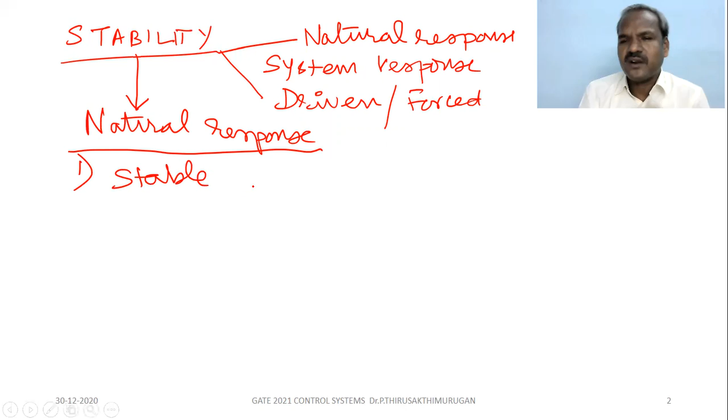What is a stable system? Its natural response becomes zero as t tends to infinity. That means a system is stable if its natural response tends to zero as t tends to infinity. So when we apply t equal to infinity, it should give zero.

The second category is unstable. So what is unstable? It is called unstable when its natural response tends to infinity as t tends to infinity. So when t tends to infinity, its natural response also tends to infinity. This is called unstable.

Third is marginally stable. What is the natural response for marginally stable? A system is marginally stable if its natural response neither decays nor grows. This is called a sustained oscillation.

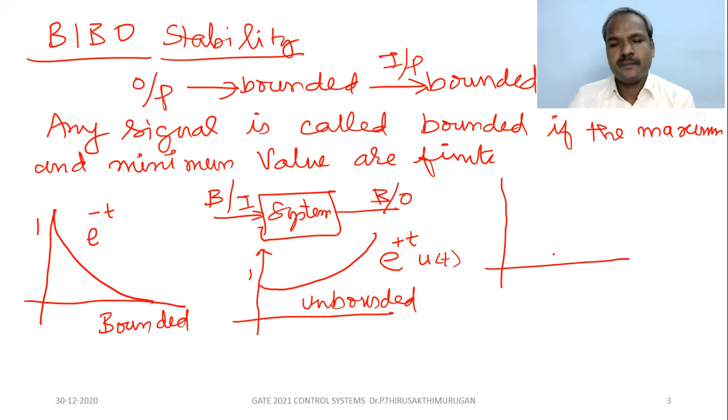One more example. This is unbounded: positive exponential, e of t, u of t. This is an example of unbounded. Consider a ramp input, the ramp response. This is also unbounded.

Ramp is an example for unbounded. So ramp. Another, see, sinusoidal. Okay, sinusoidal signal with progressively increasing amplitude, say starting from this, like this. So this response is not bounded, sinusoidal. This is called not bounded.

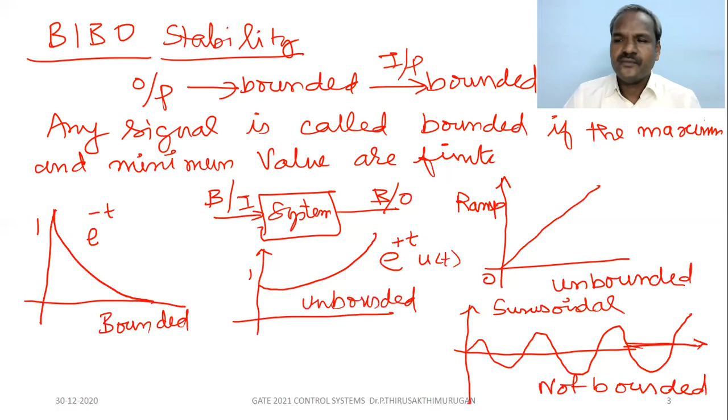Understand? See, if the exponential is positive, then it is unstable. If we have exponential negative, this is stable. Exponential negative means stable. So basically,

see, the stability of the system, the stability of any system depends only on the location of poles, not on the location of zeros. Understand? So in the transfer function, denominator roots are called poles, numerator roots are called zeros. So the stability never depends on the location of zeros.

So the stability of any system depends on the location of poles, don't forget, not on the location of zeros. Understand, my dear student friends? So, another condition. Okay, this is one condition.

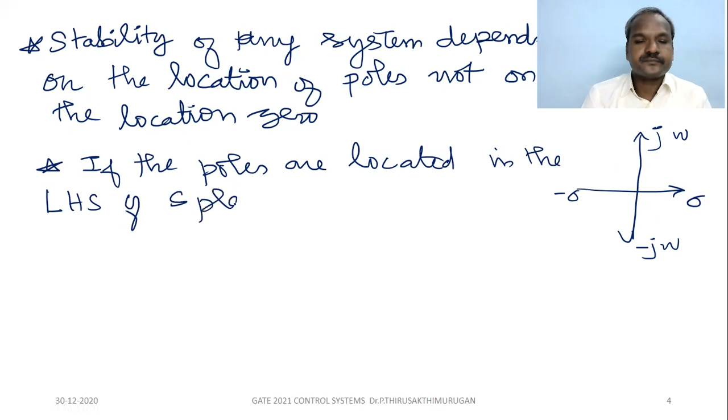Another condition: say this is the S plane, real, minus real, imaginary, minus imaginary. This is the imaginary axis, this is the real axis. If the poles are located in the LHS, the left hand side of the S plane, then the system is stable.

Next is the impulse response. We can also classify based on impulse response. The impulse response of a causal and stable system must be absolutely integrable between the limits 0 and infinity. So the impulse response of a causal and stable system must be absolutely integrable.

Between the limits. What are the limits? From 0 to infinity. Say you can have the integral from 0 to infinity of the impulse response, dt. So the impulse response of a causal and stable system must be integrable between 0 and infinity. Clear?

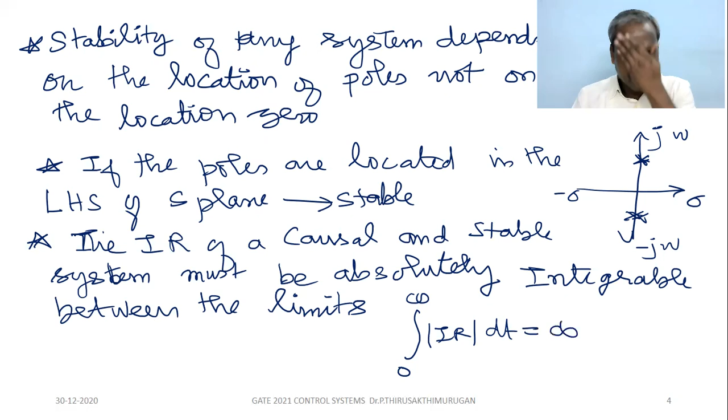Clear? Unstable. For the stable case, the integral is not equal to infinity; the system is causal and stable. Here, the integral from 0 to infinity of the impulse response dt equals infinity, because it is unstable.

If one or more poles are located on the right half of the S-plane, the system is unstable. If one or more roots or poles are located on the RHS of the S-plane, then the system is unstable.

What is the condition for unstable? The integral from 0 to infinity of the impulse response dt equals infinity.

Say, as poles approach the origin, stability decreases. Another important point: as a pole or poles approach the origin, the stability decreases. Say this is a pole, as a pole approaches towards the origin,

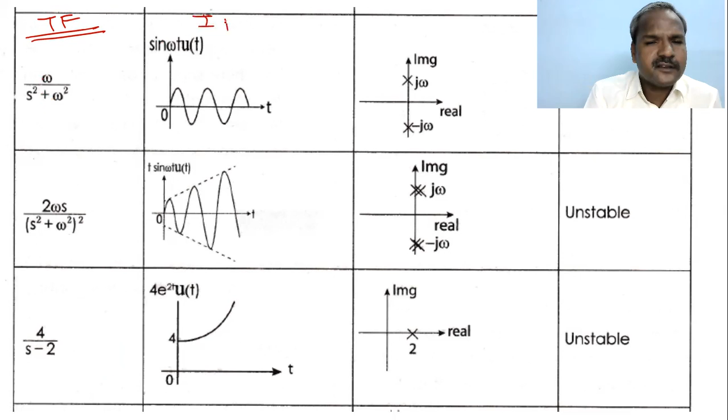Let's see some of the approaches. The first column is the transfer function. Let me change the color. Say this is a typical transfer function of a system. This is the impulse response of a system. This is the pole location on the S plane.

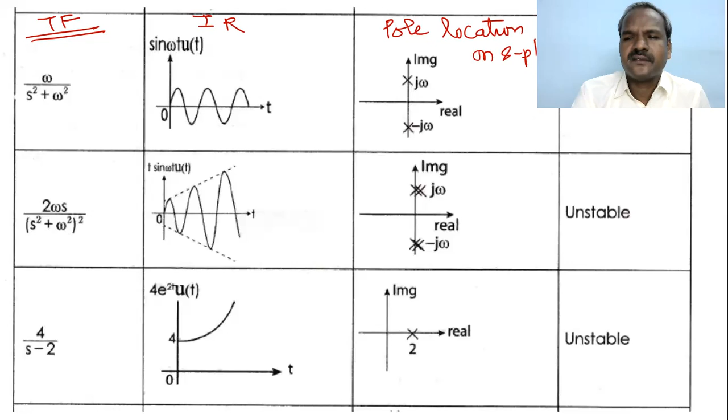So this is about stability. This last one is stability. So this is the transfer function in the Laplace domain for a sinusoidal signal, sin omega t. So the Laplace transform of sin omega t: the impulse response is sinusoidal. So there are two complex poles on the imaginary axis. So this is marginally stable. So the stability condition is marginally stable, or limitedly stable, just stable, right?

Next, see the transfer function. The time domain function is t into sin omega t, so the transfer function is 2 omega s divided by (s square plus omega square) the whole square. So this is the impulse response of the transfer function. You see here it tends to infinity, right? So what happened here? There are two or more repeated complex poles on the imaginary axis. The system is unstable.

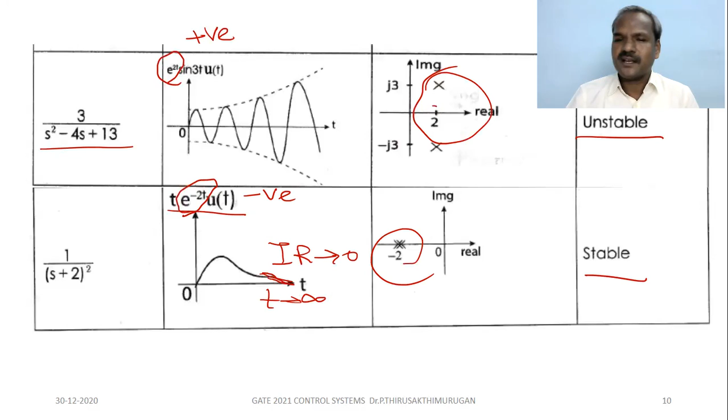Okay. Good. Next, we can classify the stability. Stability classification. How do you classify stability? There are two types of stability.

So absolute stability, absolutely stable system. So a stable system itself can be classified as an absolutely stable system, then unstable system, then conditionally stable system. Understand? When the gain parameter k is varied from 0 to infinity,

when the gain parameter k increases from 0 to infinity, if the poles are located in the left half of the S plane, okay, when we vary the gain from 0 to infinity and the poles are located on the left half of the S plane, it is always absolutely stable. So this is called absolutely

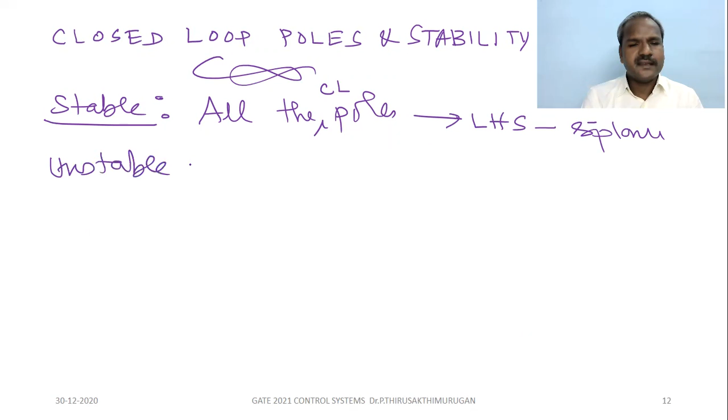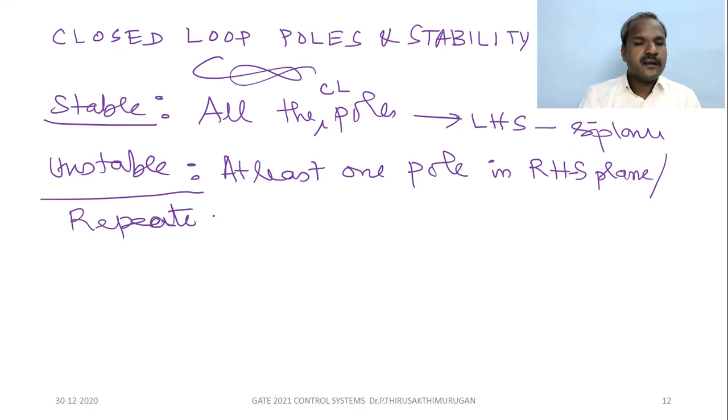So when it is unstable, the closed loop poles have at least one pole, the word is at least one pole, in the right half of the S plane, or repeated poles on the imaginary axis.

Understand? Then marginally stable for the closed loop poles. When it is marginally stable, the system has non-repeated poles on the imaginary axis, or possibly poles in the left half of the S plane.

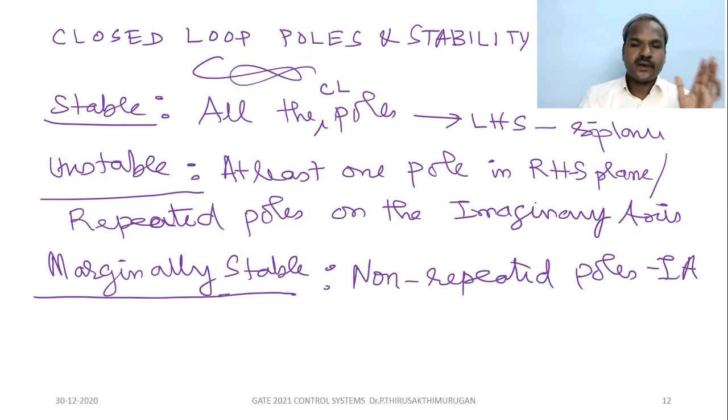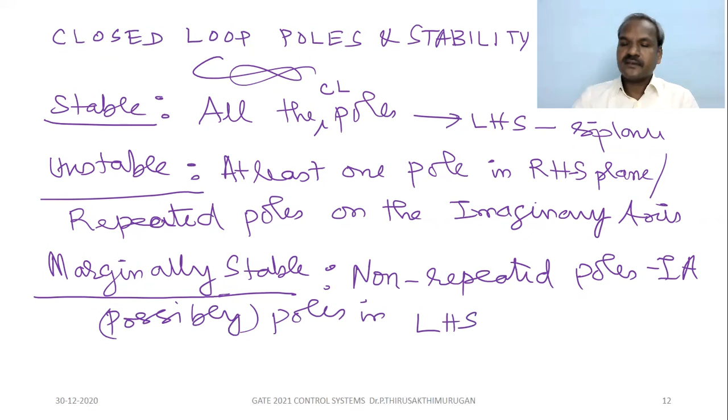Okay, and this is enough for you. Non-repeated poles on the imaginary axis, or possibly a few poles in the left half of the S plane. So this is the condition for closed loop stability. Let us see some examples.

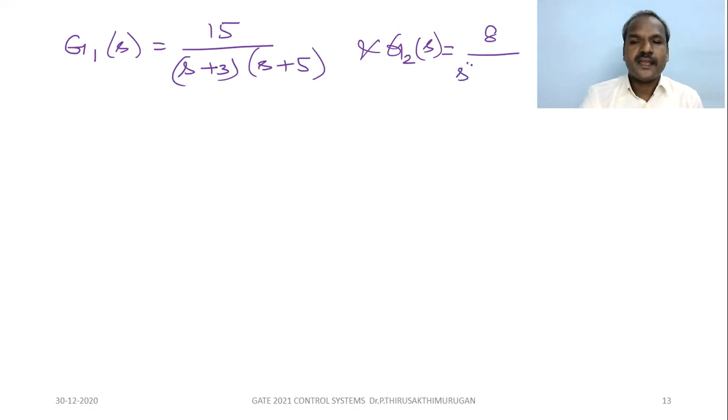Consider a second order control system, say G1 of S equal to 15 divided by (S plus 3)(S plus 5), and G2, say there are two systems, G2 of S equal to 8 divided by S square plus 4S plus 8. So this system has poles at S equal to -3 and -5, whereas this system has poles at S equal to -2 plus or minus j2.

So what is the step response of G1? Let's say C1 of t equal to 1.5 e to the power -5t minus 2.5 e to the power -3t plus 1. So this is the step response C1 of t.

So C2 of t equals minus e to the power minus 2t times cos 2t plus sine 2t, plus 1. So this is the step response of G2, and this is the step response of G1. So how to differentiate the stability of the system?

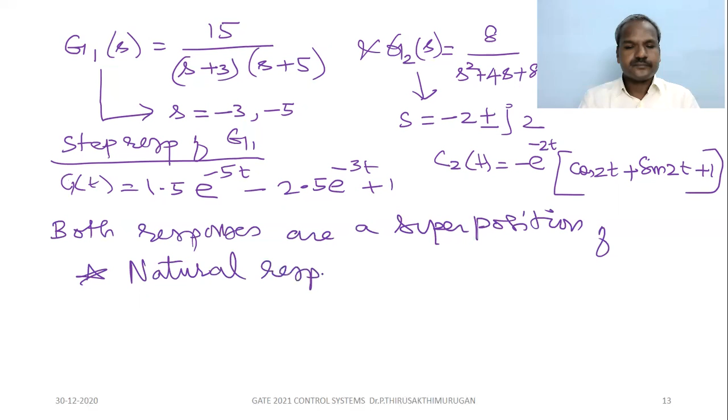Both responses are a superposition of the natural response as well as the driven response. Both step responses are a superposition of the natural response, that is the transient behavior, the transient response.

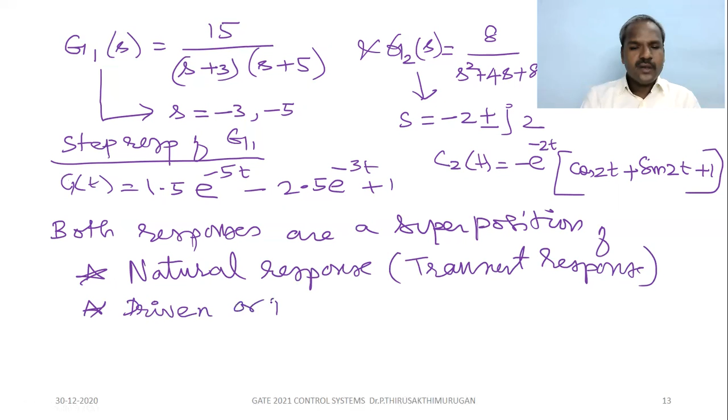Also, both have a driven or forced response. What is the driven or forced response? Steady state response. So both step responses have driven or forced responses, that is steady state response. Clear? So what is the natural response?

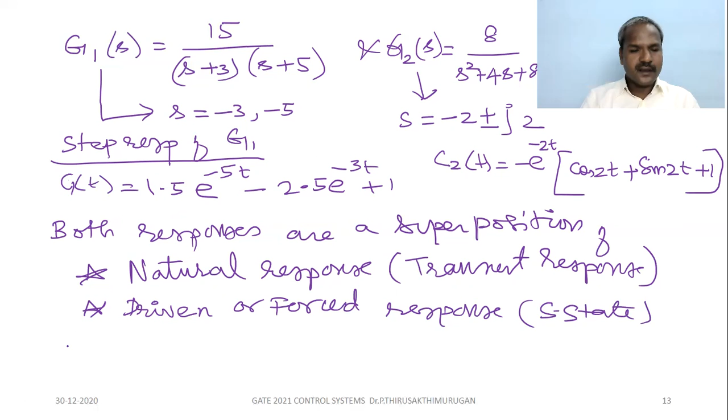In both cases, in C1 of t you apply t tends to infinity. When t tends to infinity, the exponential terms vanish, and the natural part of C1 of t becomes 0. Similarly, you substitute here, e to the power minus infinity with cos and sine terms, both go to 0, right?

So c2 of t is also 0. So both system step responses are responses to the driven as well as the natural response. Both have the steady state driven response value plus 1. This driven response is also plus 1, and this driven response is also plus 1. Both are the superposition of these two responses, natural as well as driven.

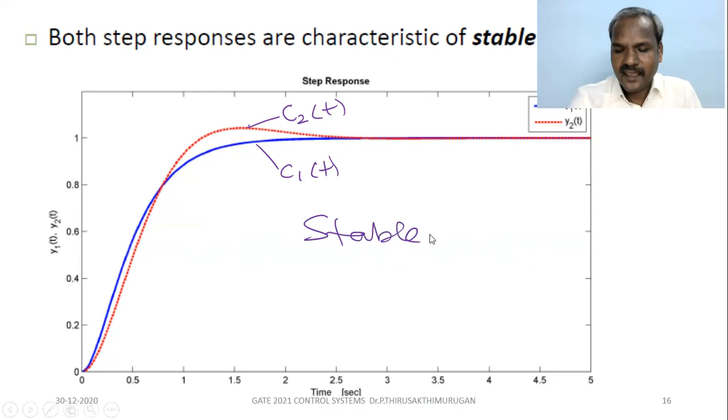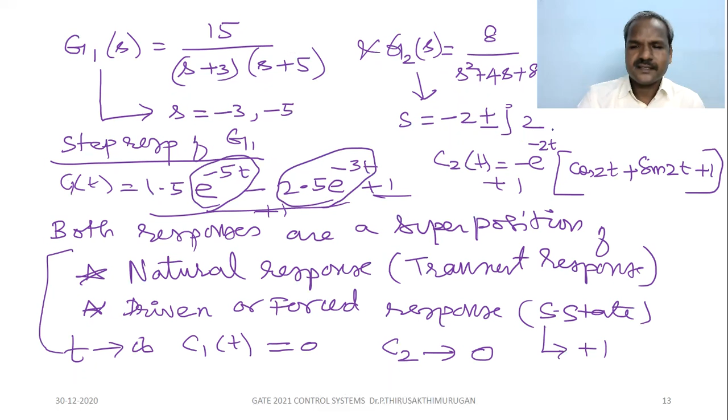So the natural response component is this one. Actually this consists of both. This is the transient natural response, and this is called the driven response. Similarly, this portion is the natural response component, and this one is the driven response component in this case also. So the driven response component in both cases is plus 1 only.

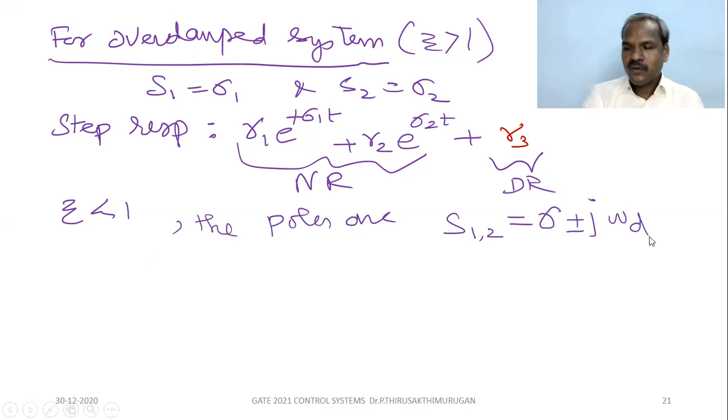So zeta less than 1, the underdamped case. So what are the pole conditions? The poles are S1,2 equal to sigma plus or minus j omega d. Okay, sigma and omega d. So what is the step response?

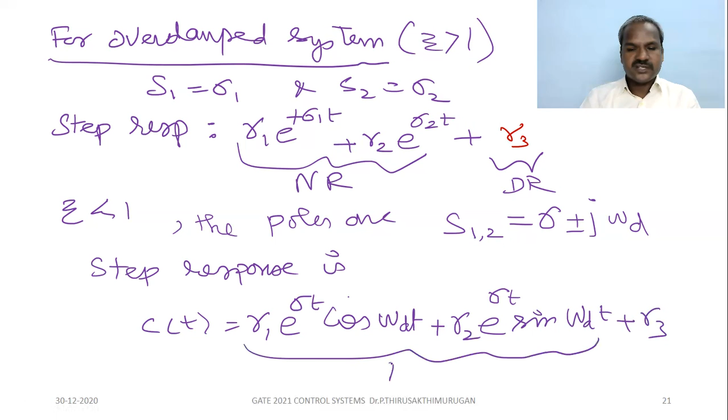Its corresponding step response is C of t equal to R1 e to the power sigma t cos omega d t plus R2 e to the power sigma t sin omega d t plus R3. So here this is the natural response, the transient response. This is the driven response. Understand or not?

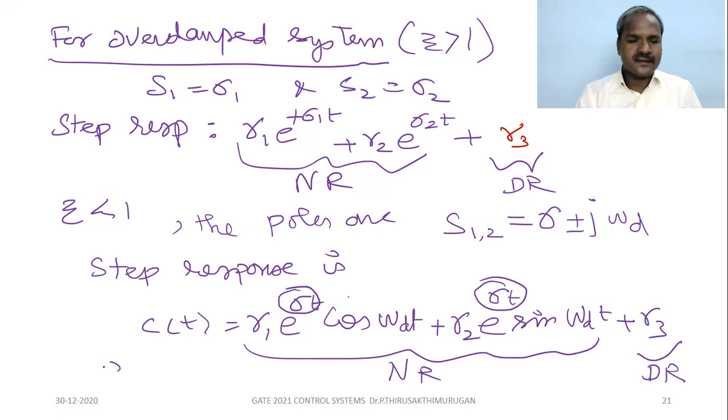So the sign of the exponential is determined by the sigma value, the real part of the system poles. If sigma is less than 0, the poles lie on the LHP, the left half of the S plane. Then the natural response tends to 0 as t tends to infinity. The system is stable.

Understand? These are all conditions. If sigma is greater than 0, what is the case? So the poles lie on the RHP, the right half of the S plane. In this case the natural response tends to infinity as t tends to infinity. Understand or not? So the system is unstable. Clear? Any doubt with this?

So the case of purely imaginary poles. What happens with purely imaginary poles? So LHP poles correspond to a stable system. RHP poles, right half of the S plane poles, correspond to an unstable system. This is the classification. It seems that the imaginary axis is a boundary for stability. Okay, it is the truth, right? So this is the boundary for stability.

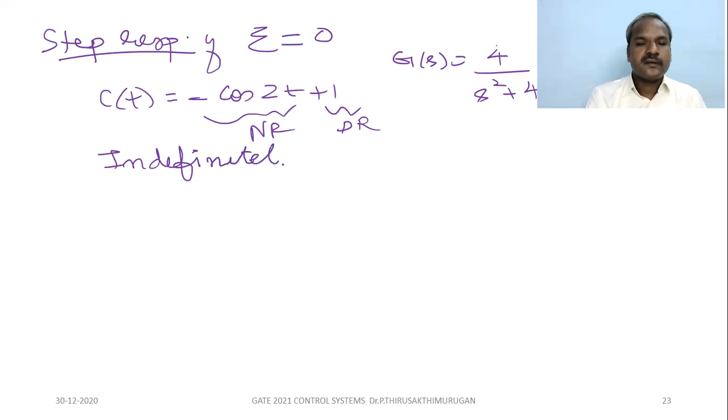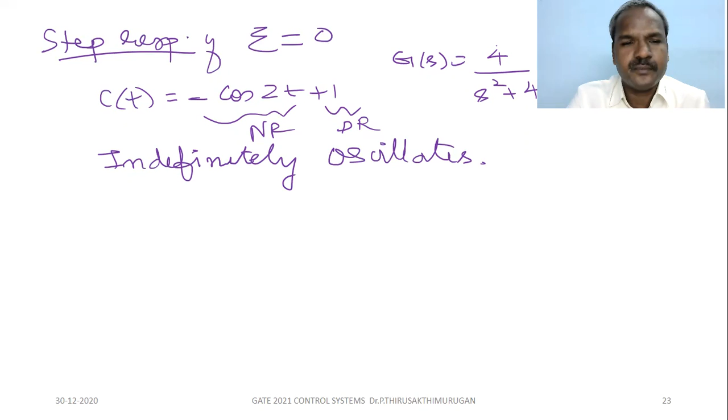Here the response of the system is minus cos 2t plus 1. This is the natural response, this is the driven response. So the natural response neither decays to 0 nor tends to infinity. So the system is marginally stable. That means it oscillates continuously, indefinitely oscillates. Understand? So the step response of an undamped system gives marginal stability.

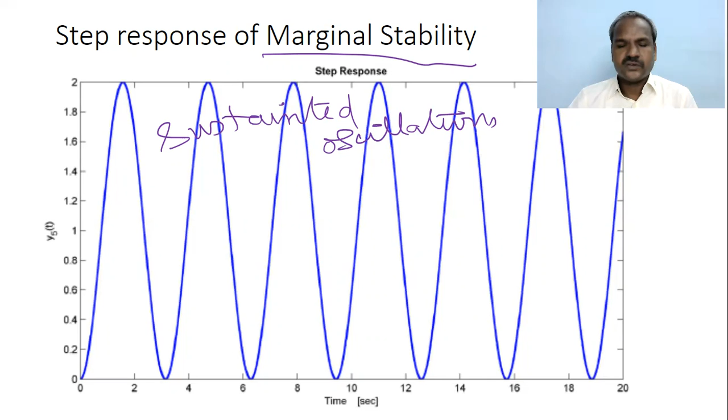So this is called sustained oscillations. Clear? Then the repeated imaginary axis poles, that also we discussed. Say, for example, let us consider a system G of S with repeated imaginary poles. So poles lie on the imaginary axis and are also repeated. For example, I'm telling you.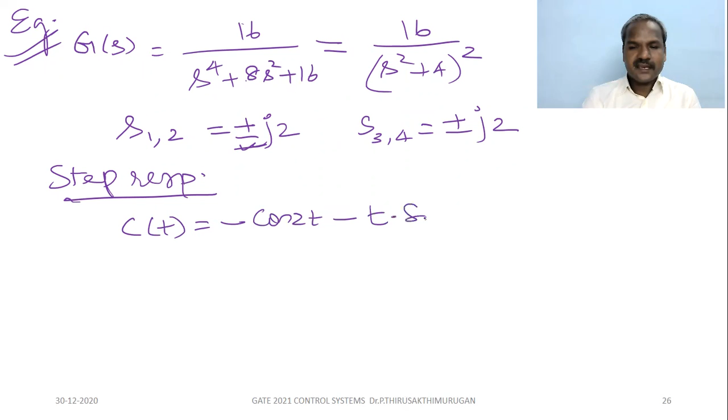G of S equal to 16 divided by S power 4 plus 8S square plus 16. This can be simplified as 16 divided by S square plus 4, the whole square. So the repeated poles on the imaginary axis: S1,2 equal to plus or minus j2, and poles 3 and 4 also plus or minus j2. So the step response of the system contains both natural and driven response. C of t equal to minus cos 2t minus t sin 2t plus 1. This is our natural response, and this plus 1 is the driven response, right?

So what happened? When multiple roots lie on the imaginary axis, the system is unstable. Remember, multiple identical poles on the imaginary axis imply an unstable system. So let me show you.

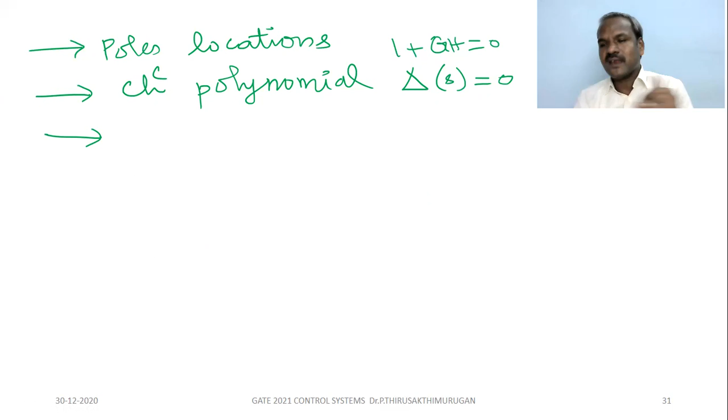What is the characteristic polynomial? Normally it is denoted as delta of S equal to 0. For the closed loop, this characteristic polynomial is nothing but 1 plus GH equal to 0. This is the closed loop characteristic polynomial. From the factors of the characteristic polynomial, delta of S, we can tell whether the system is stable or not. Understand, my dear students?

Also we can determine from the array. We can form an array based on the Routh-Hurwitz criterion, and based on it we are able to determine stability. So first we see the stability from the coefficients of the characteristic polynomial, delta of S coefficients, right?

Let us consider a stable system that has all poles in the left half of the S plane. The closed loop transfer function is T of S. We forget about the numerator, because stability is determined by the location of poles, the roots of the denominator, the characteristic polynomial. So the stable system has S plus A1, S plus A2, up to S plus AN. All the denominator poles have negative real roots, so for all LHP poles the Ai are greater than 0.

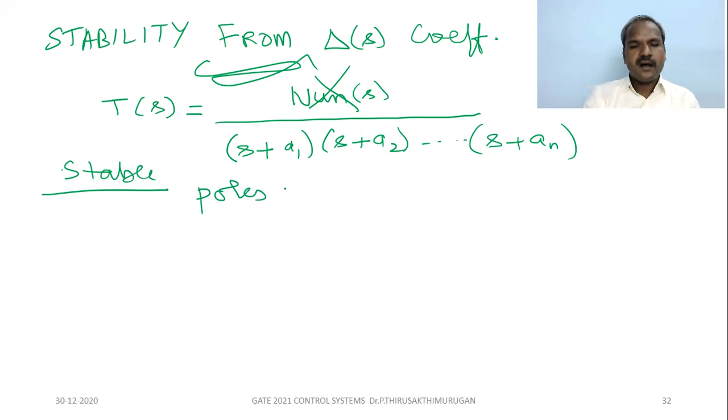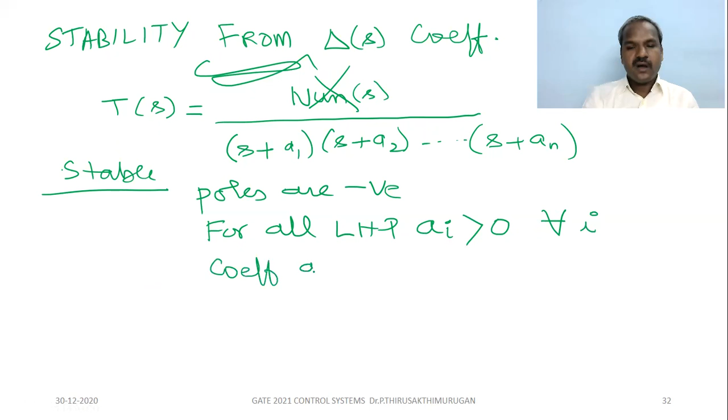So the result is that all coefficients are positive. That is the condition for this system to be stable. On what basis is it stable? Poles are negative. For all LHP poles, i equal to 1 to n, Ai should be greater than 0, for all i. So all the coefficients are positive, since this is a stable system. If any coefficient of delta of S is negative, then there is at least one RHP pole, right?

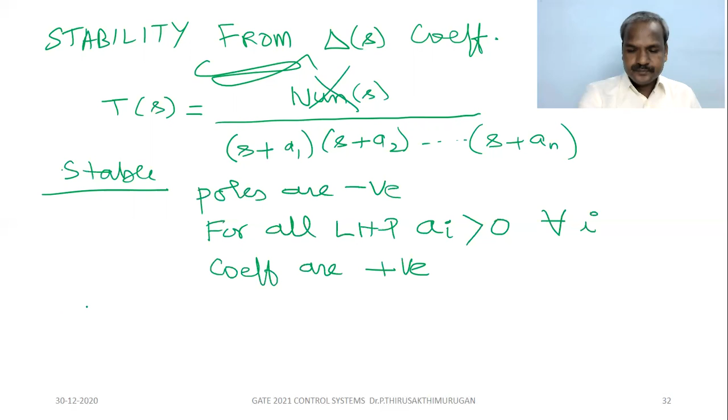The condition for classification of stability from the coefficients of delta of S, the characteristic polynomial: if any one coefficient of delta of S is negative, then the system is unstable. That means one pole is located on the right half of the plane, so the system is unstable. This is from the coefficients of the characteristic polynomial.

Another point: if any one coefficient is equal to 0, the system is either unstable or marginally stable. Clear, my dear students? If all the coefficients are positive, the system may be stable or unstable. That we cannot determine from the characteristic equation alone.

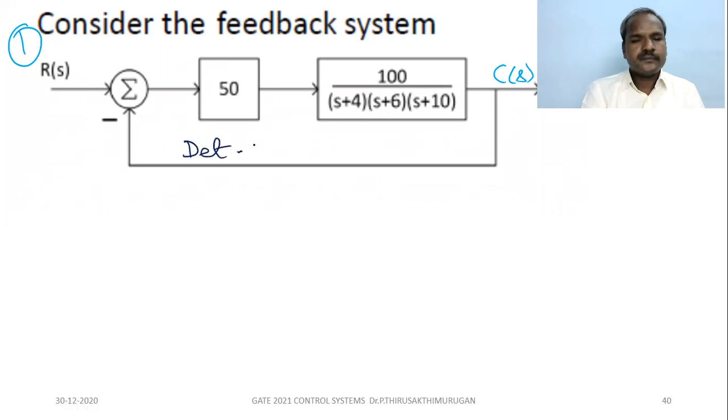So the 50 is the gain and the 100 over (S plus 4)(S plus 6)(S plus 10). Okay, so let us find a solution. You consider the feedback system, then determine the stability. The question is: determine the stability using the Routh-Hurwitz criterion. Okay, that is the question. So what is the solution?

First we have to find the characteristic equation. What is the characteristic equation? For a closed loop system, it is the denominator of the closed loop transfer function. So first find the closed loop transfer function of the system. T of S: just multiply 50 into 100, this becomes 5000. So this 5000 can be directly put. This is the easiest way to determine the closed loop transfer function.

Then multiply these three factors, and along with that you add 5000 in the denominator. So what is 4 into 6? 24. 24 into 10, 240. So in the denominator the constant becomes 5240. So in the closed loop transfer function you can easily determine it, just multiply and add the numerator coefficient to the constant.

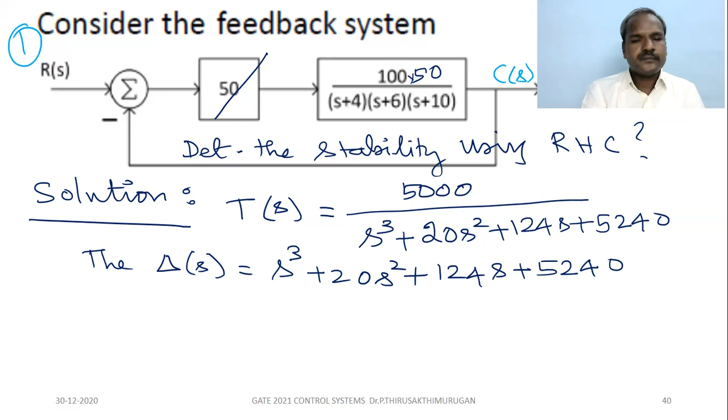Let us form the first two rows. You can take the common factor, you can reduce by a common ratio also. So for the first two rows, S cube and S square, put the values: 1 and 124. Then 20 and 5240. You see here, we can divide this row by 20, so 5240 divided by 20 becomes 262, right?

So we can simplify by scaling an entire row by a factor. Scaling is for simplification of multiplication. Scaling an entire row by a factor is possible. Because multiplying 20 into 124 or 5240 into some other value is very difficult to calculate, and no calculator is allowed inside the GATE center, I think, right?

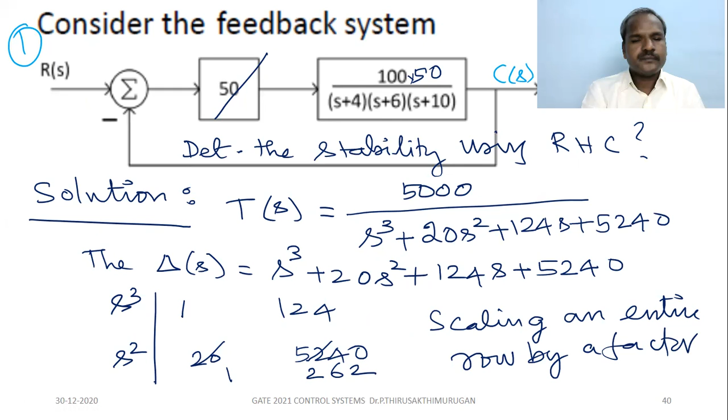So now let us calculate the remaining factors. S cube, S square, S power 1, S power 0. 1 and 124. This is 1 and 262, we scaled the values, right? So what is the value? 1 into 124 minus 262, it becomes minus 138. Similarly this becomes 0. So we have minus 138 and 0.

Then you take these two rows. Minus 138 into 262 minus 1 into 0, divided by minus 138. So 138 cancels and we will get 262. Very easy, right? So this is 0. Understand? So now look into the first column elements of the Routh array. So what are the important observations?

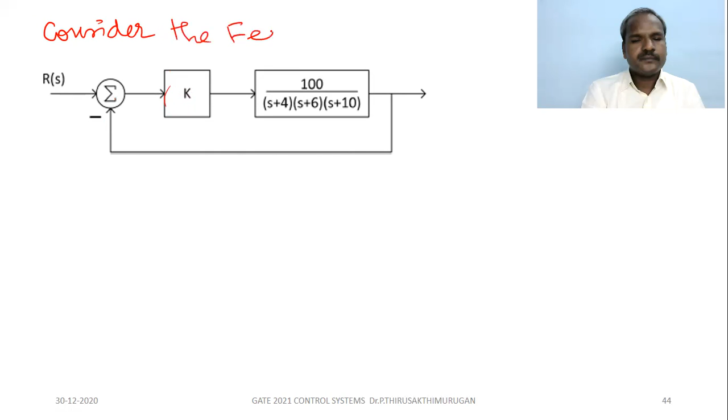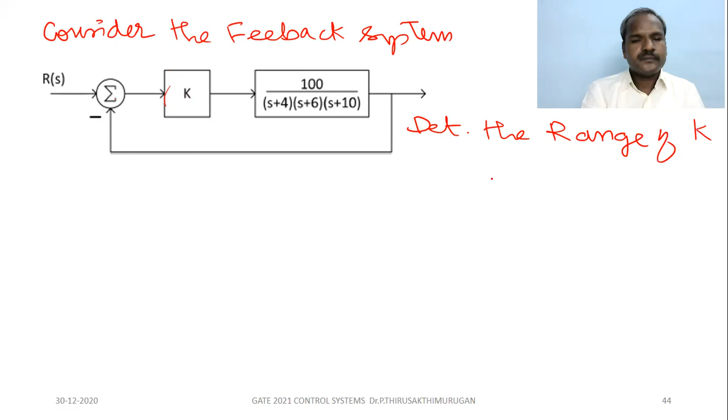One more thing. Consider the same previous feedback system by replacing 50 by K. The question is: determine the range of K for stability as well as instability. Range of K for stability. Okay, so what is the solution? Let us see the solution for this.

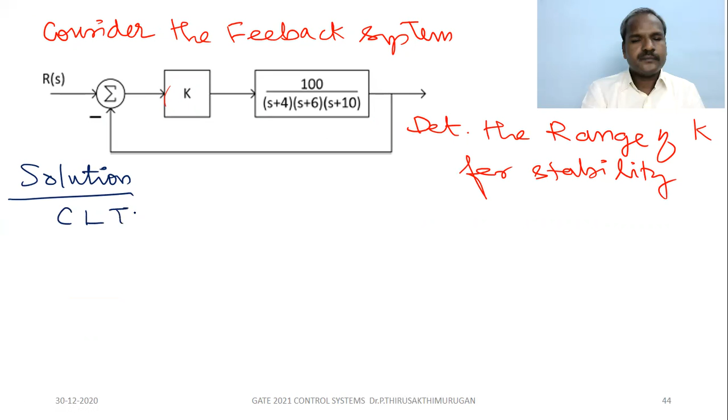So again, let us compute the transfer function. What is the closed loop transfer function, CLTF, T of S? Very simple, same, but replacing the coefficients. So 100K divided by S cube plus 20 S square plus 124 S plus 100K. Understand or not? 100K. Okay.

Sorry, small mistake. 100K plus 240, I missed it in the previous sheet. Okay, 100K plus 240, right? So this is the closed loop transfer function. Okay. So the characteristic equation,

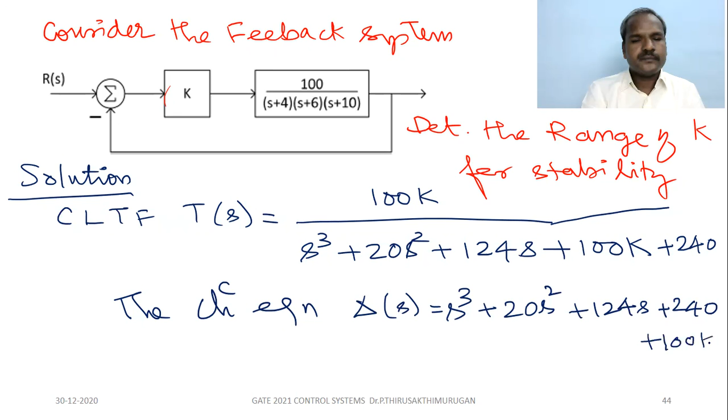that is Δ(s) = s³ + 20s² + 124s + 240 + 100K = 0. Let us form the Routh array for this characteristic equation. So Routh array: s³, s², very simple, you can train up very fast. Okay, s to the power 0.

Okay, so what is the s coefficient here? You multiply this and this minus this and this. So what will we get? We will be getting 112 minus 5K, right? This becomes 0. So then how to calculate this one? This into this minus 0 into 1, right? Then divided by this.

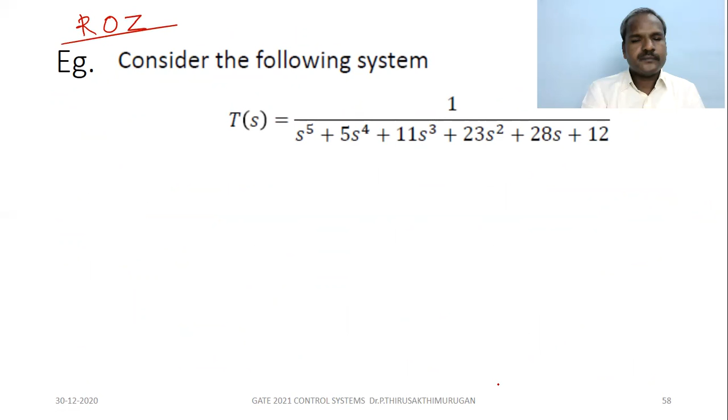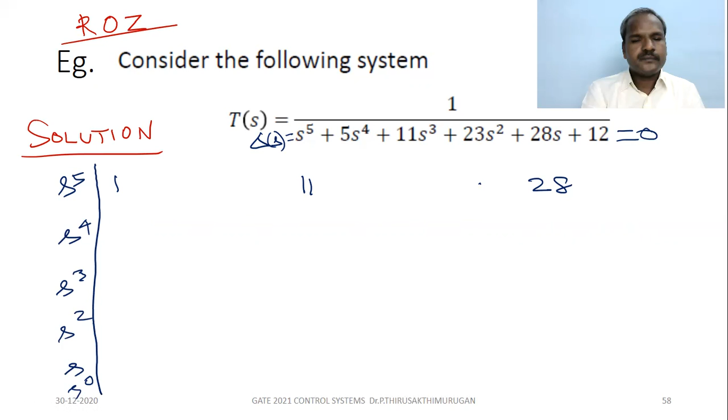So consider this one example for row of zeros. Consider this system. So let us do the solution. Let us form the Routh-Hurwitz table. The characteristic equation del of s equals s power 5 and so on. S power 5, s power 4, s cube, s square, s, s power 0. So 1, 11, 28, then 5, 23, then 12. So let us evaluate the third row.

So what is this element? S cube. So 5 into 11, 55, minus 23, divided by 5. So please do the calculation, student friends. So I'm getting 6.4. Then 5 into 28 minus 12, divided by 5. Do this, please, my dear students. Tell me the answer. What are you getting? 25.6.

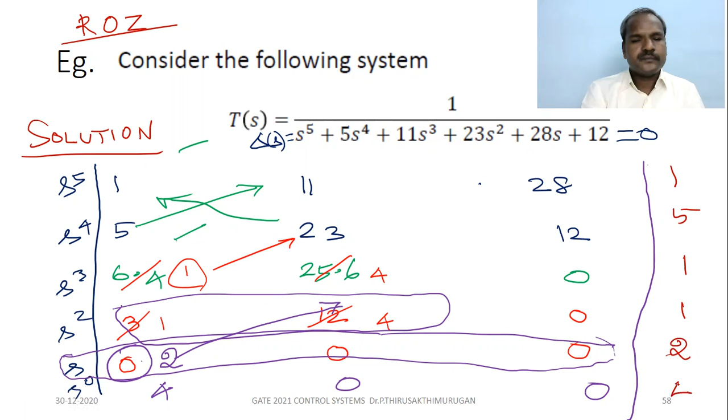So what do you infer from this result? There is no sign change. Inference from the first column: no sign changes. So no RHP poles; no poles lie on the right half of the s plane. But the row of zeros indicates that the system is marginally stable. So even though there is no sign change and no RHP poles, the system is marginally stable.

Clear? So let's conclude with the summary on stability analysis. First, if the coefficients of delta of s have different signs, the system is unstable. Then if some coefficients of delta of s are 0, the system may be marginally stable at the best.